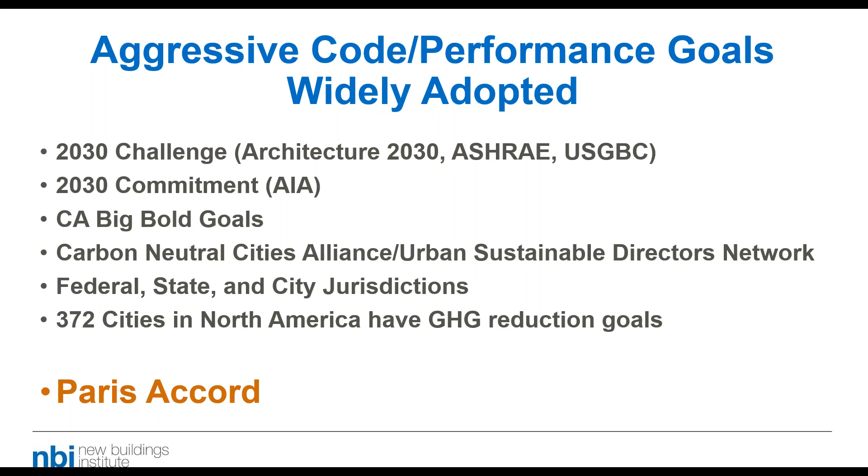Interestingly, since the Paris Accord, a whole bunch of cities and states have also signed on to meet the Paris Accord goals. Even though the US pulled out, the cities and states decided they were going to proceed with their commitment. Now 372 cities in North America have greenhouse gas reduction goals, so there's wide precedent and goals for improvements in building performance.

This is because it becomes more difficult to achieve that level of savings within the code process. It's not impossible, and we're working on it, but there are many aspects of building performance that are outside the scope of code and need to be addressed perhaps by design standards or other policy measures. For example, plug loads, unregulated loads, process loads, cooking loads are not really regulated by energy codes. To achieve the performance improvement we need in those areas, we might be talking about other mechanisms than code. But we're trying our best to get as much into code as we can.

Some terminology for background here. We talk about this as a series of measures for a stretch code. Other people call this a reach code or a step code. There are some places on the continent where these things mean different things, and places where the uses are interchangeable. For our discussion, we consider them all to be a similar process.

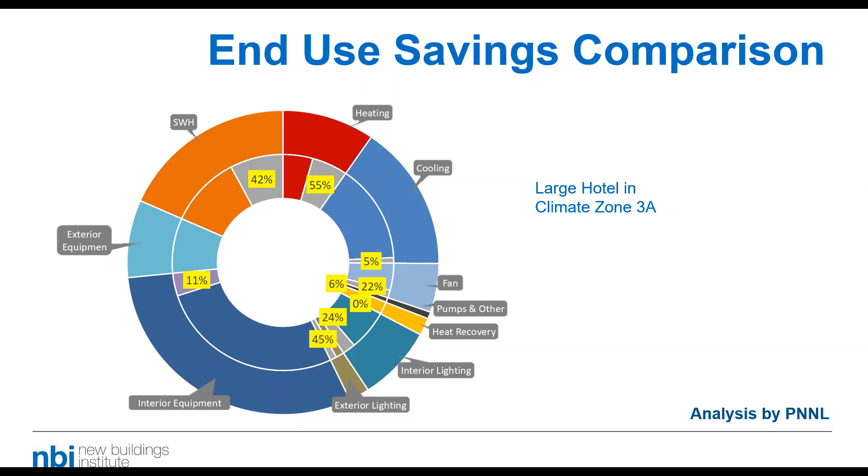The outer part of this graph shows the end use breakdown of a building that meets the ASHRAE 90.1 2013 standard, and the inner ring shows the end use breakdown of a building that meets the enhanced requirements after these stretch code strategies are adopted over that standard. So what you see is where the end use savings for this particular building type are from these measures. In the case of large hotel, we get a significant amount of savings in the service hot water area and another significant amount out of heating. That's a 55% reduction on heating from the heating energy, not a 55% reduction in building energy, of course. But you can see how the end use breakdown of savings came out in this analysis for large hotel.

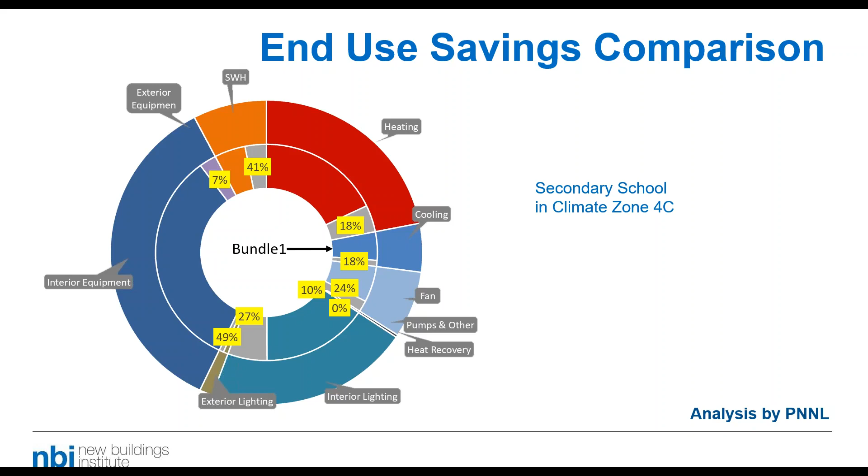And for comparison, here it is for a secondary school in climate zone 4C. Again, you can see the individual breakdown of savings. In this case, our largest category was in interior lighting, but we also got significant savings in heating and service hot water, which of course is a smaller percent of the load in this building type than in a residential building.

But as with all analysis of code performance, this gets weighted across climate zones by population and building type. And when we put that all together, the average savings across the entire building sector is just over 20% for this analysis.

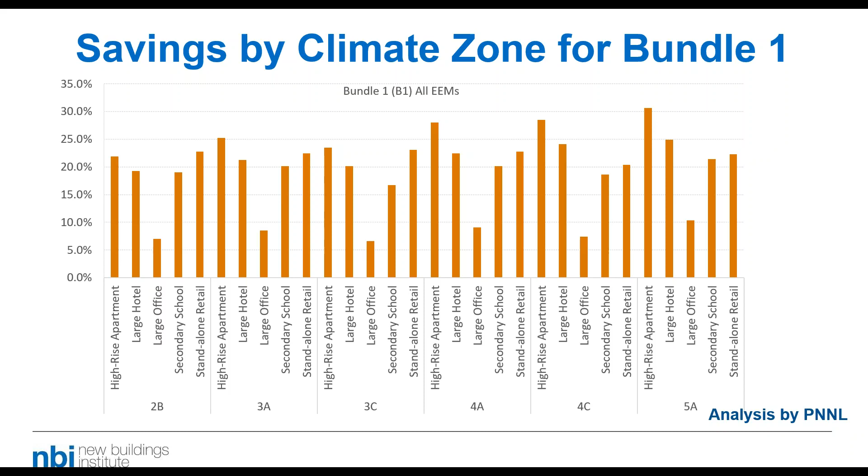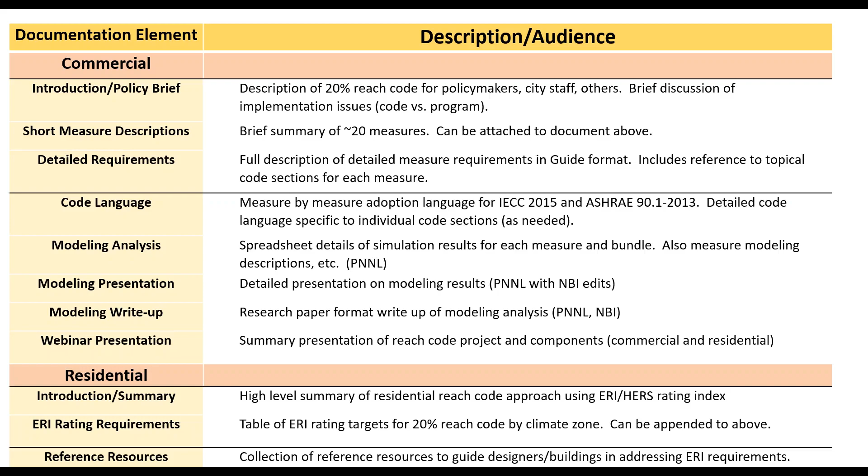So let me talk a little bit about what is in the documentation that we've put together. This is information that's available to you from our website. There's a whole bunch of supporting information, including this webinar will be available, but also the analysis from PNNL and a white paper about that analysis, etc. So on the left column of this slide, you can see all the different pieces of the 20% stretch code provisions that we've put together. There's an introduction policy brief document, a short document that you can use with policymakers. There's measure descriptions, detailed requirements, etc. down the list. I'm going to go through these real quickly just so you understand what they are in more detail.

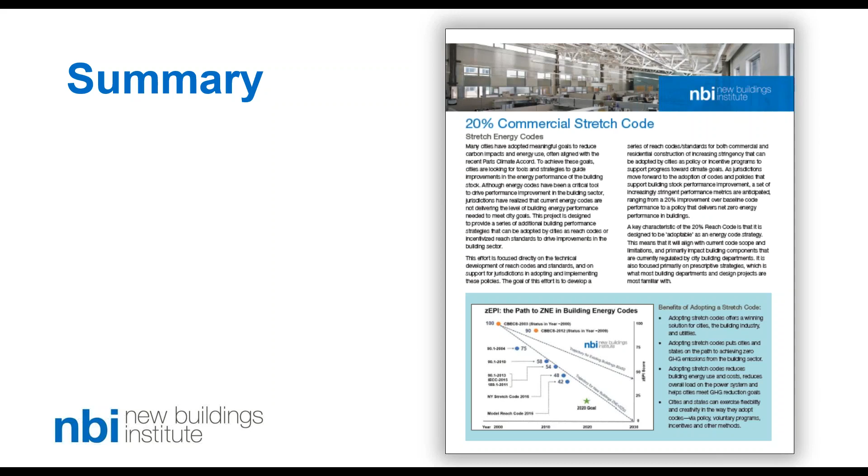So we have a standalone summary piece. This is meant to be an explanation of what stretch codes are and how they can be used. This is kind of a policymaker leave behind. If you're working with city policymakers or other political organizations that want to understand what we're working with here, this is a very short explanation of the stretch code, meant really just as a high-level summary. The main document looks like this, again available on our website.

And this is the whole package right here, all put together. It's also meant to be divided up if you want to target certain audiences with more or less technical information.

So this is the cover of our 20% stretch code provisions. We have an introduction that goes into detail about stretch codes, how they are used, what they're used for, why they're a good idea, etc. Again, just an introduction to the concept of stretch codes.

There are short descriptions. This is the short piece that goes through all of the measures that are in the stretch code. And I should point out that what I'm talking about now is the commercial side of this code. This goes through all the measures that we've defined to identify what strategies to use to add over your base code to achieve these savings.

It's a little hard to see in this, but the right-hand columns show the correlation with different sections of ASHRAE and IECC code to show you where this language would affect the existing base codes. So we did the analysis to ASHRAE 90.1 2013, but we also compared the code to IECC standards as well in terms of figuring out where it aligns and where it affects the code.

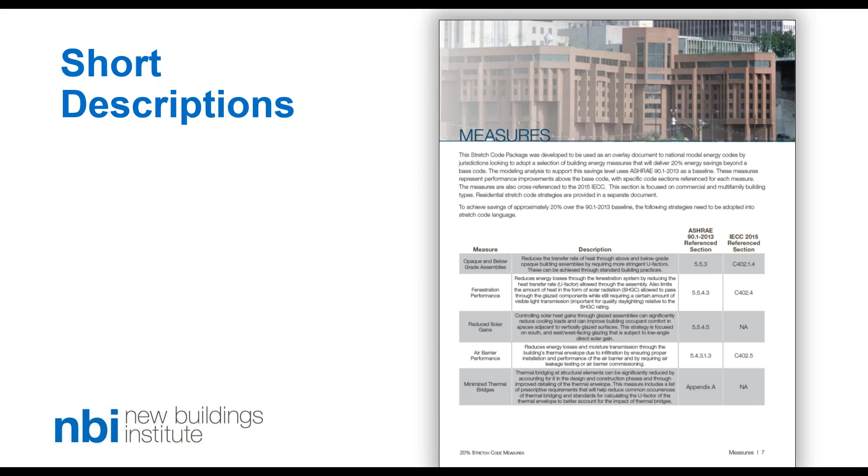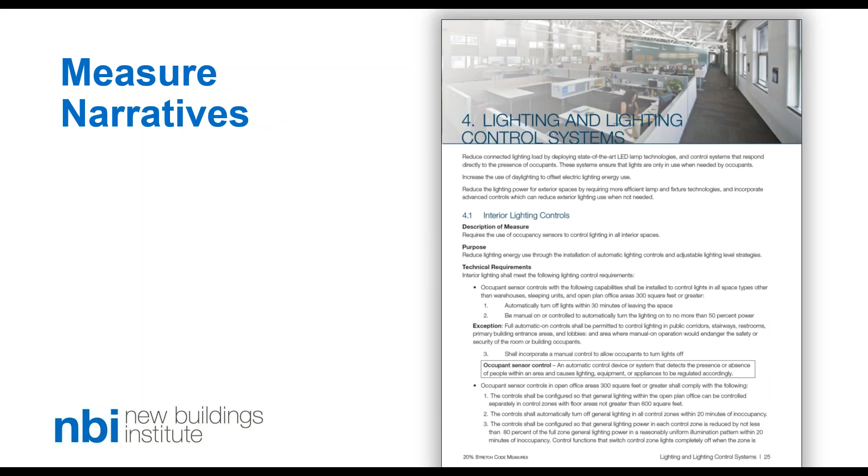There's a longer narrative about each individual measure through the course of the document. So this example here shows interior lighting controls requirements. You can see that we have a description, a purpose, and technical requirements for each measure going through the bundle of measures.

And then there's a bunch of case studies in here of jurisdictions that have adopted stretch codes, and those are pretty good examples to share with policymakers who are considering this. If you're trying to make the case that a stretch code should be adopted, you can get an understanding of what the implications are at the jurisdiction level.

Eventually, in order to adopt this as code language, you need to write the specific language that allows you to identify what is required in the code. This is highly variable depending on what your code baseline is, what your city policy is, and what your code cycle looks like. So in our document, we have identified the sections of code that would be affected by adopting these measures, and we've written the requirements, but we have not written it into specific code language.

We are happy to work with jurisdictions to adopt specific code language, but there are many different variants, and it would be a large effort for us to write it for every possible use. So instead, we are willing to work with you to help you identify exactly how to convert the language we've written into your local code.

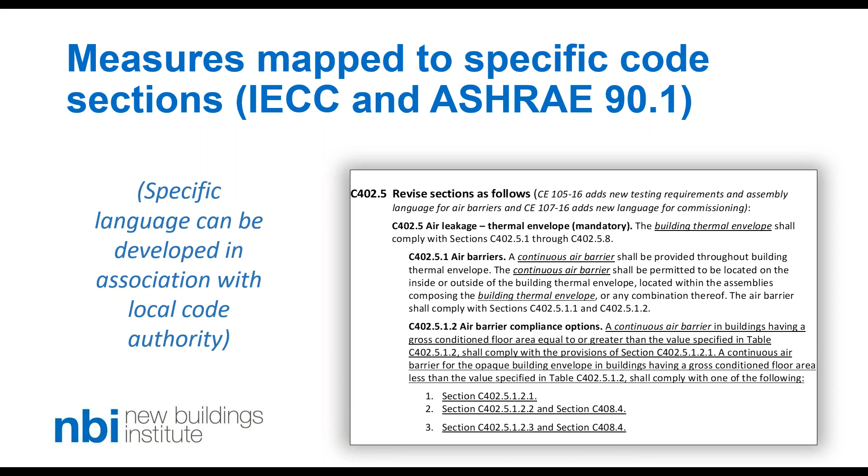So let's talk for a minute about some of the commercial measures. I'm going to hand this off to Mark Lyles to talk about some of our specific measures, and then we'll come back to some more general information. Mark? Great, thank you, Mark.

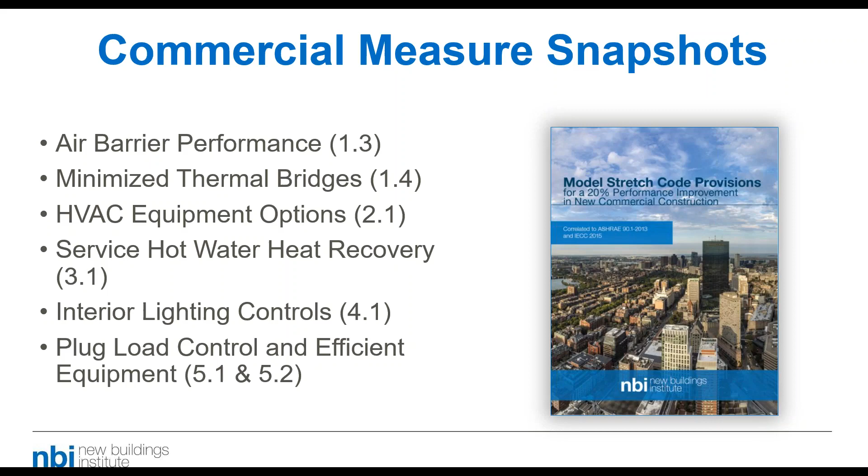I'm going to provide a quick overview or a snapshot of some of the commercial measures that you can find in the stretch code document. There are 22 measures in total, and I just plan to highlight a couple for you today. These are the ones that I'm going to provide a snapshot on. For each one, I will provide an overview of what the requirements are that are in the document, a breakdown of the energy savings that we saw from that measure through the analysis done by PNNL, and then what I'm calling an illustrative example of how we're seeing that measure being played out in the field, either from research that we've done or other information that we've found from people who are really leading designers and engineers in the field.

So the first one that I want to talk about is air barrier performance.

What we are proposing here in the stretch code is that for buildings under 50,000 square feet, they need to reduce air leakage through the thermal envelope by blower door testing their buildings. For buildings over 50,000 square feet, there are a couple different options that buildings can comply with. The first is to do either component testing, looking at a floor by floor basis, or they can participate in a continuous air barrier commissioning program conducted by a third party entity.

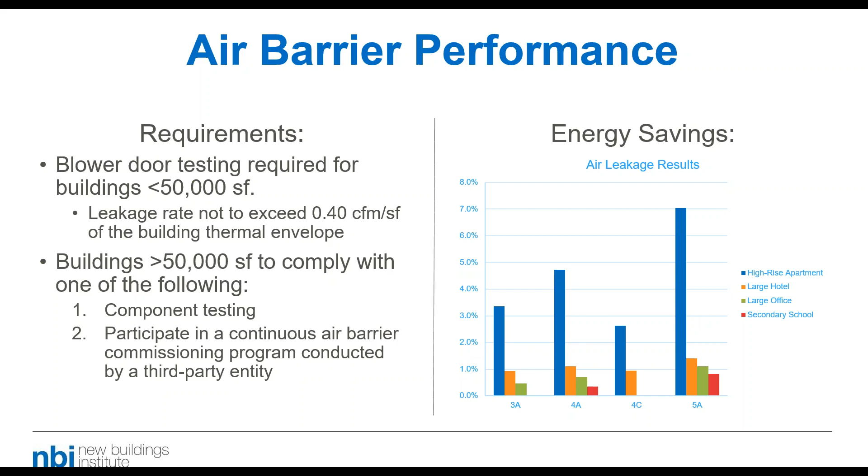As you can see from the analysis, the results are more significant in the cooler climates, which makes sense. And we're also seeing significant savings here from the multifamily prototype.

For the example here, I want to highlight an ASHRAE research paper that is looking at 31 different buildings in Washington State. Washington State and the city of Seattle have had this as a code requirement since 2009, so they have a good baseline of how this has impacted commercial buildings over a longer period of time.

What this paper looked at was five different air barrier types. You can see them there on the right: liquid applied, curtain wall, window wall, sealed sheathing, and sheet applied. It found that all but 4 buildings that they looked at met or exceeded the proposed air leakage targets. The paper concludes that a qualified design team should have no problem achieving the 0.4 CFM per square foot air leakage requirement that we are proposing in the stretch code.

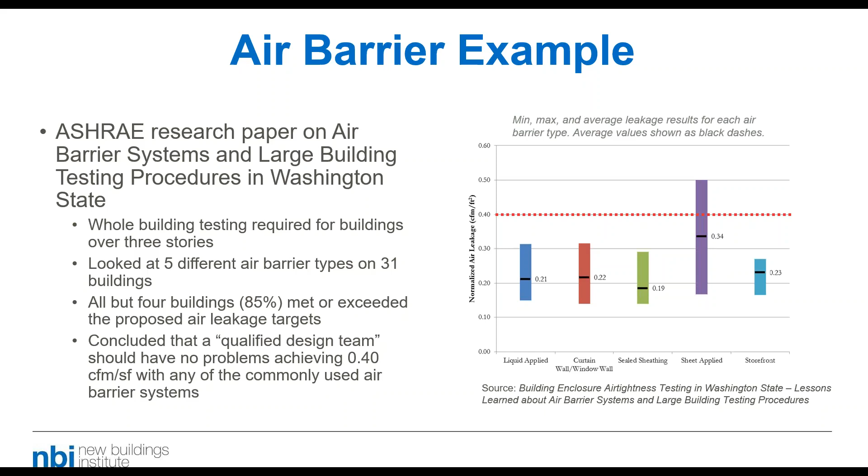The next one I want to highlight is thermal bridging. We're excited to introduce thermal bridging in the stretch code document because we know that under the current model codes, there's no good way for those codes to address thermal bridging through the thermal envelope.

What we're proposing here as a requirement is that design teams need to account for thermal bridging by using an area weighted average for each envelope component. So instead of looking at the entire assembly, we're asking design teams to look at the different components, in this case when they have a surface area that exceeds greater than 1% of the area of that portion of the envelope that they're accounting for — so for the roof, the wall, etc.

They don't need to do that if there's at least an R5 continuous insulation underneath it, which has been shown to reduce thermal bridging. But we're asking them to account for this for a majority of their common envelope interfaces.

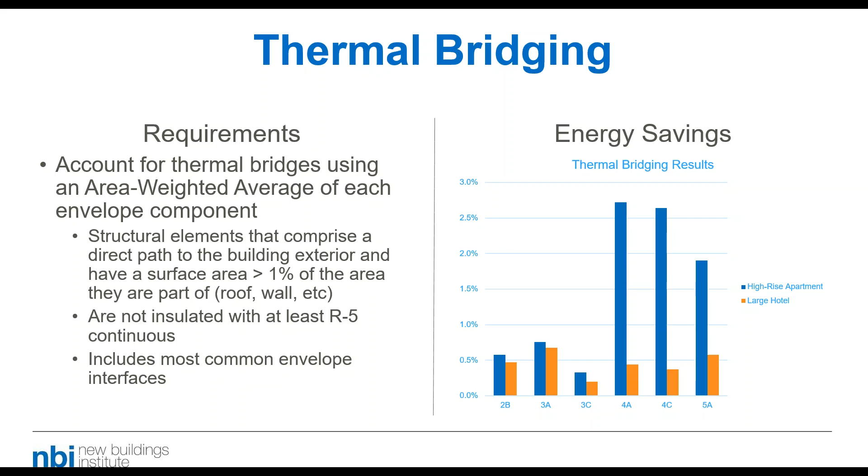Because the code does not really have a good way of addressing this, you can see that there are significant energy savings from this measure, especially in the cooler climates. We only looked at this for the high-rise apartment and large hotel building prototypes, but we hope to be able to analyze this for other building prototypes going forward.

Just a quick introduction of what thermal bridging is for people who may not be familiar with it. Thermal bridging is caused by highly conductive elements that penetrate the thermal insulation and/or misaligned planes of thermal insulation. They allow heat flow to bypass the insulation layer and serve to reduce the effectiveness of the insulation. In that picture below, you can see that the shelf angle supporting the brick bypasses the blue rigid insulation, basically compromising the value of that insulation, allowing heat to bypass it.

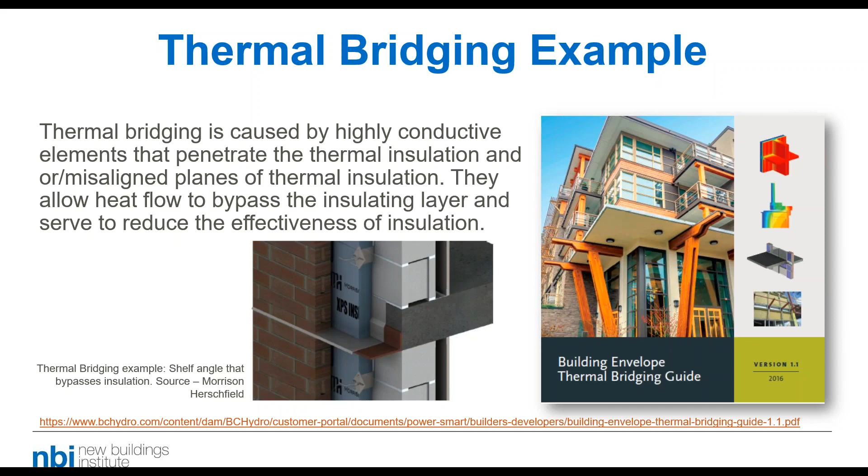A lot of this information I'm showing here is coming from a really great resource put together by Morrison Herschfield and available through BC Hydro, called the Building Envelope Thermal Bridging Guide. I've provided a link at the bottom of the screen for people who want to take a closer look at this document. I'm also going to quickly provide an example of how they're proposing to account for thermal bridging and some tools they make available to design teams.

In the example I'm showing here, they're looking at the U value for each construction type found in a typical high-rise residential building unit. You can see that they have called out the key components of that envelope for the concrete wall and then the window wall spandrel. They include in their document a catalog where they've modeled the energy flow, or heat flow, through each of those typical details within the thermal envelope.

I just wanted to highlight a couple things here. What I've circled in red shows the overall U value for the concrete wall and the overall U value for the window wall spandrel, which gets at what we're proposing through our area weighted analysis in the stretch code. I also want to highlight the balcony slab here, which even though it accounts for a smaller portion of the overall envelope, is responsible for the second highest amount of heat flow through the thermal envelope. So we know that non-thermally broken balconies are a major source of heat loss from buildings, and we just want to make sure design teams are accounting for it in their designs.

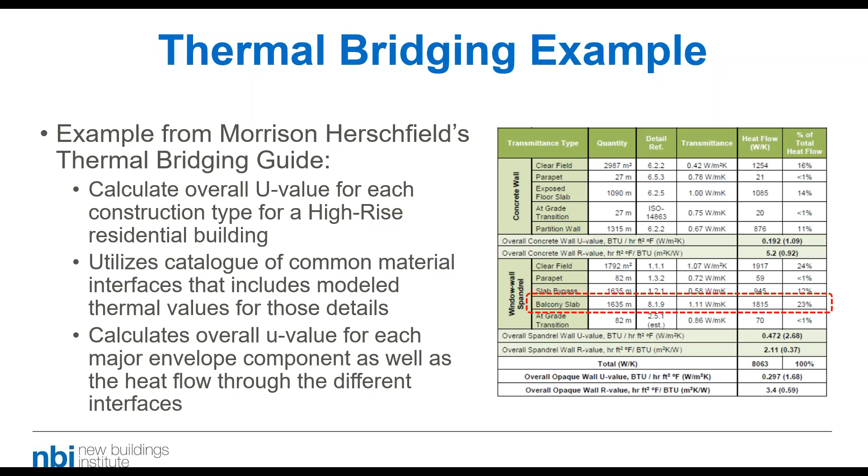The next one I want to talk about is our efficient HVAC or dedicated outdoor air system measure. This measure is focused on either selecting high efficiency HVAC equipment, and the values we're providing in the stretch code document exceed the federal preemption values. So we are proposing this as an option.

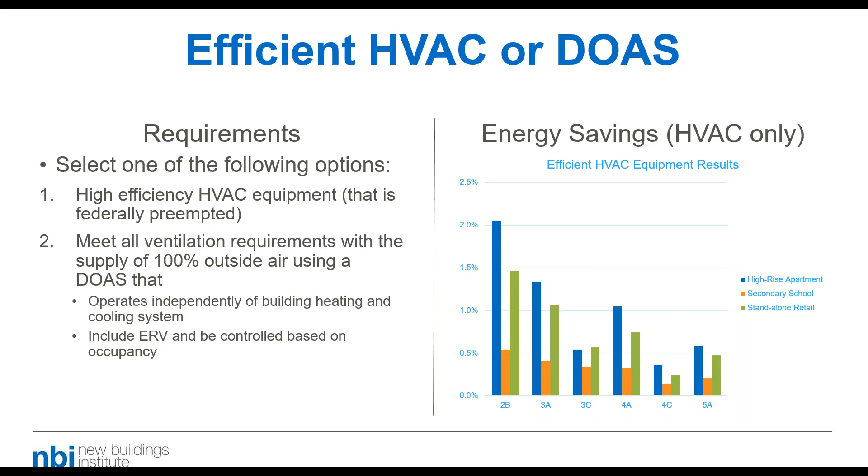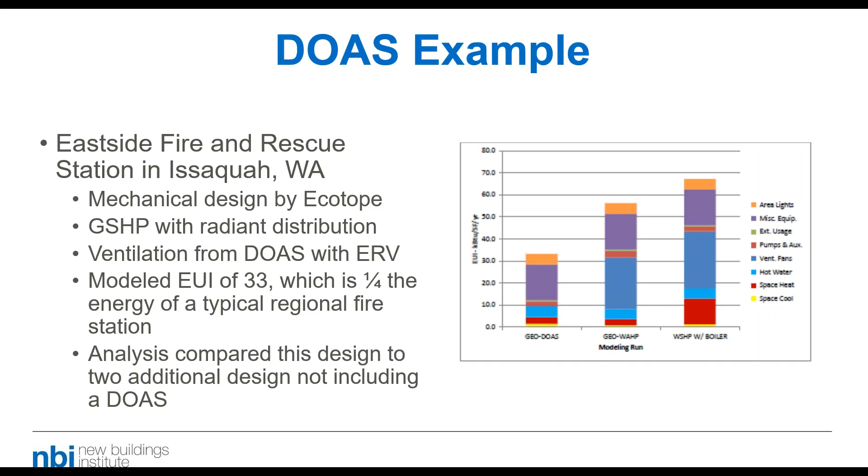Service hot water heat recovery is the next measure I want to talk about, where we are proposing that project teams utilize heat recovery and/or solar thermal water heating to meet at least 40% of the domestic hot water load. This has significant energy savings implications for high-rise or multifamily building types where you have a higher hot water heating load.

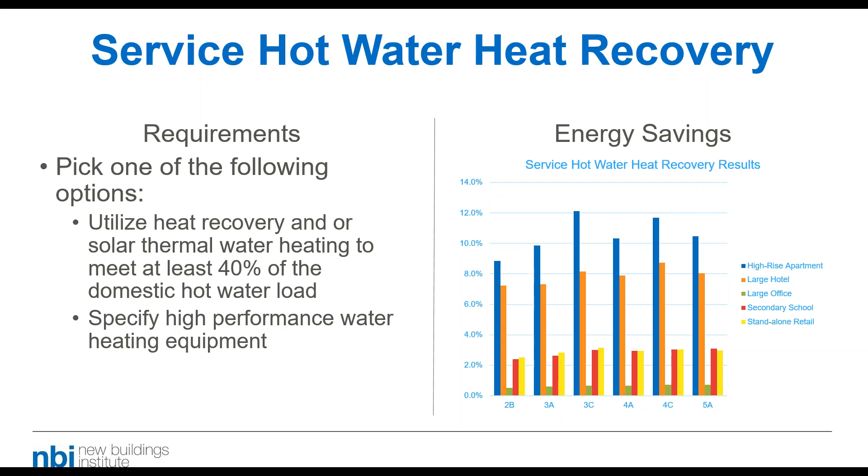This aligns with a lot of the analysis we've seen done for our multifamily initiative, also available through our website. The example I want to highlight here is a drain water heat recovery unit, which is one way to satisfy the requirements of this measure. What this does is recover all that hot water going down the drain of your shower, preheating that water before it goes into your hot water tank. We've seen this applied in many Canadian provinces, where it's even a prescriptive code requirement in Manitoba and Ontario, and a lot of manufacturers for this technology are up in Canada. It's also being proposed for Title 24, 2019 through the CASE initiative, so we'll be tracking that as well—lots of opportunity here for energy savings.

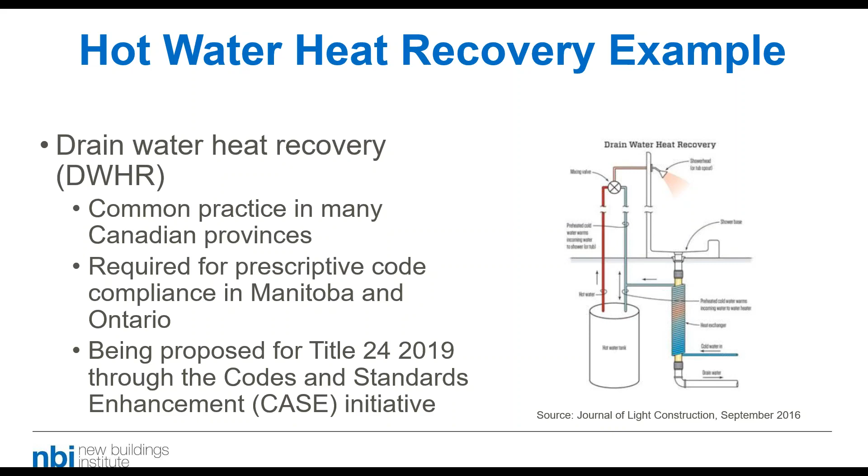Interior lighting control requirements are really structured around requiring additional occupant sensor control in most spaces. So we're expanding upon the base requirements found in 90.1 2013 for additional spaces that need to have occupant sensor controls.

The way we've structured it, there are specific requirements for open office areas greater than 300 square feet, and also for sleeping units, which need control devices that will automatically switch off all permanent luminaires and switched receptacles within 20 minutes of the space being vacated. So that applies mostly just to hotels.

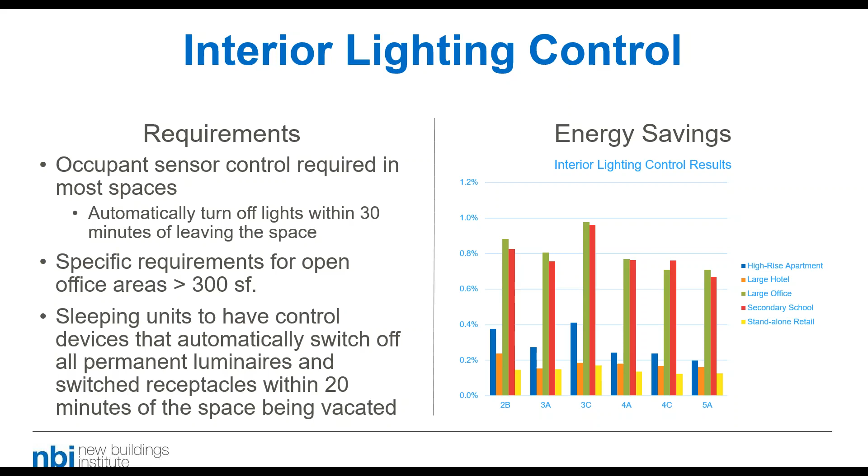The example here is from our 2015 study on zero net energy building controls. In this study, we looked at 23 building control systems in 23 ZNE buildings. When it came to the lighting systems in these buildings, we found that not only were they really efficient, they had LPDs that were 40 to 60% less than code.

Every one of these buildings was using photocells and occupancy sensors, and the lighting controls themselves were accounting for a significant portion of the whole building energy savings. In no cases was the energy savings less than 11%. So for these really high performing ZNE buildings we looked at, the design teams were counting on photo controls and occupancy sensors to deliver significant energy savings.

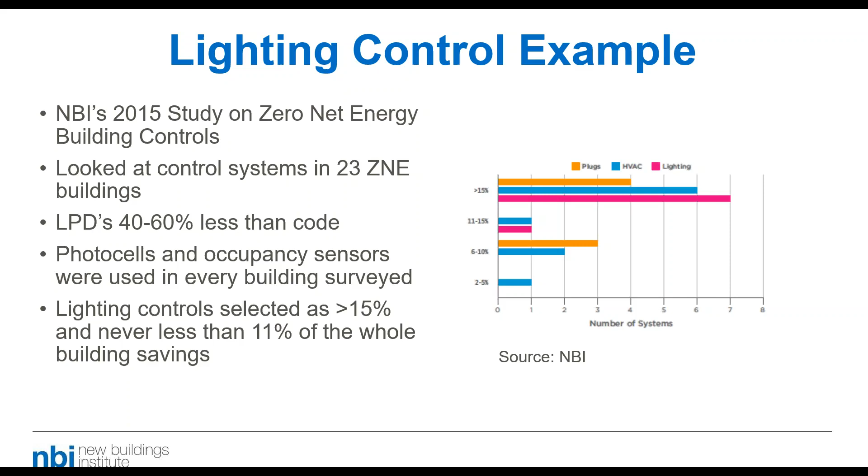The last one I want to talk about is plug load reduction. As Mark mentioned in his introduction, this is something that is a big bugaboo for us, just because a lot of the plug load equipment and loads are really outside of what you typically find in energy codes.

For the requirements, we are pulling in the requirements from ASHRAE 90.1 2013 about that 50% of all receptacles need to be controlled. Even though we couldn't claim any savings from that measure through the modeling analysis, we still wanted to make sure that that was in the code for any jurisdictions that might have the IECC as their base code.

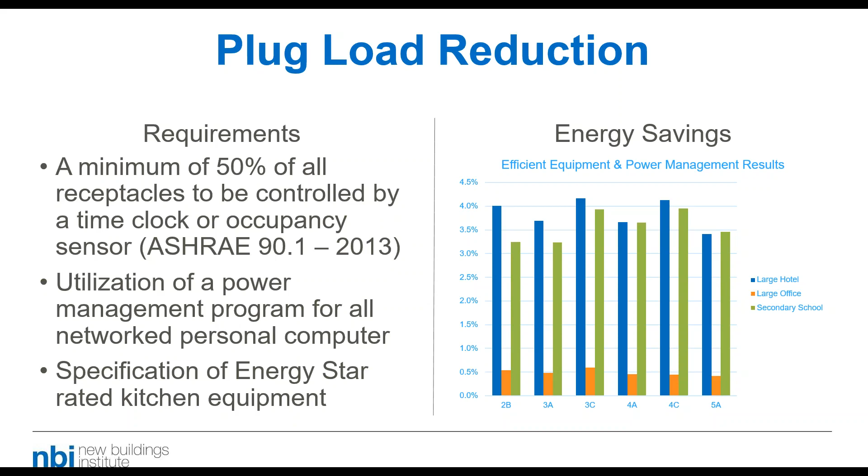So they have that as well, because the 50% controlled receptacles is not in the IECC model codes. We're also requiring the utilization of a power management program for all networked personal computers, as well as a specification of ENERGY STAR rated kitchen equipment. As you can see, the ENERGY STAR rated kitchen equipment is really driving a lot of the energy savings that I'm showing on the right-hand side of the screen.

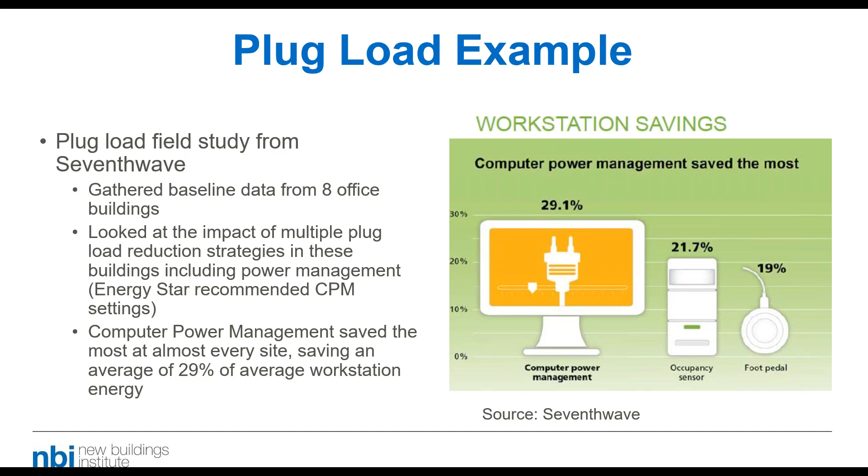The example I want to reference is coming to us from Seventhwave, who's done a lot of great field research on plug loads. In this case, they gathered baseline data from 8 office buildings in Minnesota, I believe, and looked at the impact of different plug load reduction strategies. They found that computer power management saved the most energy compared to the additional strategies they looked at. It was just over 29% per workstation, just by enabling the ENERGY STAR recommended computer power management settings.

So with that, I'm going to pass it back over to Mark. That is just a snapshot of the measures in the 20% guide, and Mark's going to take you through the residential requirements. Thanks very much, Mark. So what we've been talking about so far is the commercial code requirements that we've built into our stretch code provisions. Residential requirements we treated a little bit differently, so I'll go through some things about that.

The first thing we did is look at leading residential developers around the country in different climate zones to see what they were doing to achieve high performance in residential requirements. As many of you are aware, in residential there's a lot of use of the HERS rating system, the home energy rating system, and that has been adopted into IECC code as an ERI, an energy rating index for residential homes. That is the way we've keyed our REACH code approach.

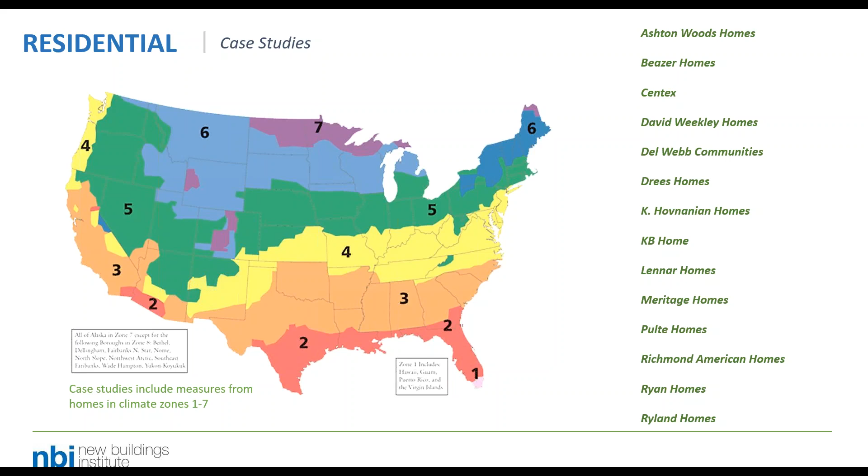Home automation systems play into this as a feature. Whether they are directly contributing to energy use or not, they provide the potential for better integration with energy systems. Ground source heat pump is a relatively common feature in high efficiency homes. Energy recovery ventilation and heat recovery ventilation we see very often, and some other features like gray water storage and recycling, which doesn't directly contribute to energy use per se, but is part of the package of these leading edge homes. Of course the windows are very good. We often see low E house wrap, very good airtight construction, and occasionally PV and battery storage.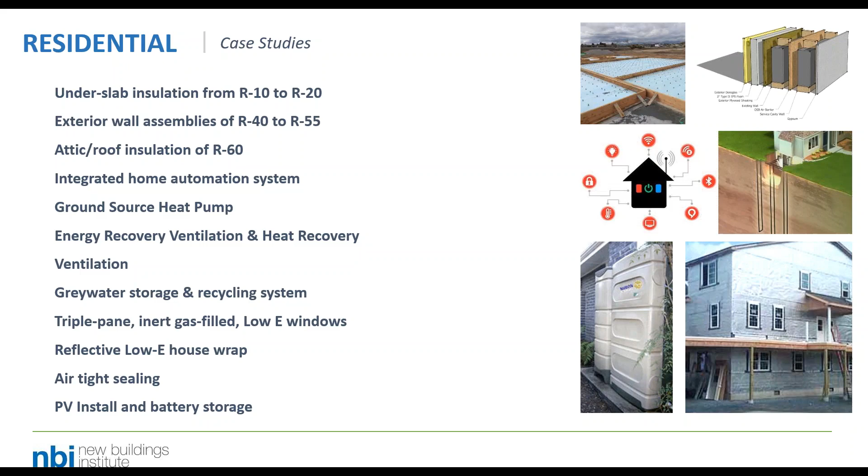So you can see that these are features - some of them energy features, and some related sustainability features, but they're fairly common in what's considered the best homes being built out there now. Based on this, we looked at HERS scores of different code prototypes, and that's what's shown on this chart. On the left, the code or program is identified. The approximate HERS ranking or ERI ranking is shown in the second column, some envelope requirements in the third column, and other features in the right column.

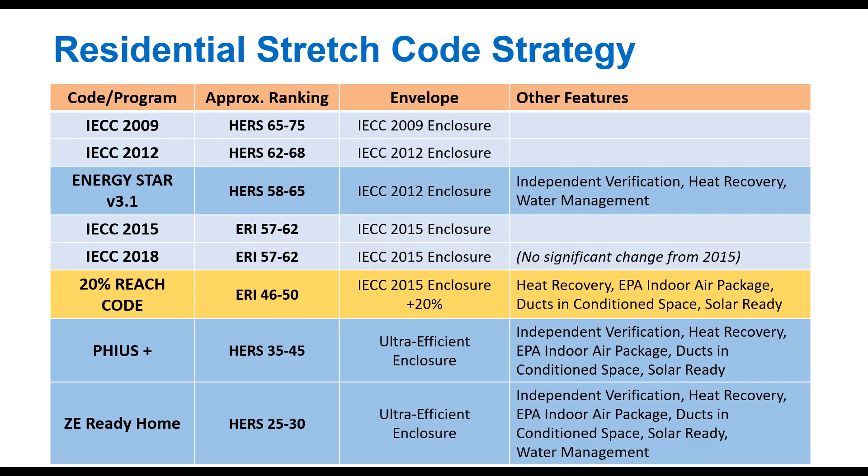Our 20% REACH code strategy is the yellow highlighted row. We're targeting an ERI of 46 to 50, which is better than current IECC requirements, not quite as good as the passive house standards or the ZE Ready home that's been released, but pretty close. We're following the IECC enclosure plus 20% for the requirements, and then adding heat recovery, the EPA indoor air package. Ducts are required to be in a conditioned space, and it needs to be at least solar ready. That gives you an idea of where our residential REACH code strategy falls in the larger environment of HERS ratings. You can also see the third row down is Energy Star 3.1, so we're targeting performance a little bit better than that, and IECC is also moving ahead of that now. Hopefully Energy Star will move up in that.

So that gives you an idea where we're at on our residential code targets, and that information will be on our website soon. It's not there yet. Right now we've released the commercial package, but we can give you the targets for HERS, which is a self-contained system, which is great. It's a great way to think about advanced performance in the residential sector.

So let's talk a little bit about where we want to go from here with our REACH code development. NBI is involved in developing code strategies and REACH code programs with different jurisdictions all around the country. Within the context of this model stretch code strategy, we're still planning to release a 40% strategy, a design standard. Much of it may be adoptable as code, but some of it probably requires other policy approaches. And we're working on ZNE code performance standards. All these things are happening simultaneously.

We're already working with jurisdictions that are targeting higher performance than 20% above 2013. We've also worked with a few jurisdictions that are piloting ZNE code approaches, thinking about how they're going to adopt those, or looking at outcome-based performance approaches. So there's a lot going on in the code world with different jurisdictions experimenting with different approaches to aggressive performance in the building sector.

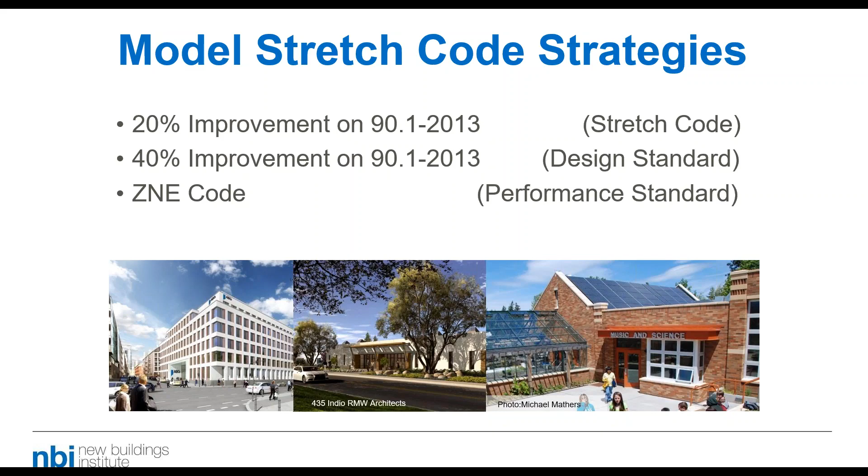Even though we design buildings to work perfectly, none of them actually do. So when you submit a code submittal for a building, you're assuming that everything's going to work the way it's supposed to, and that's what the code wants. But of course, we know that doesn't quite happen, so we try to account for some of that. And of course, that's an unregulated load because there's no way the code can address that directly.

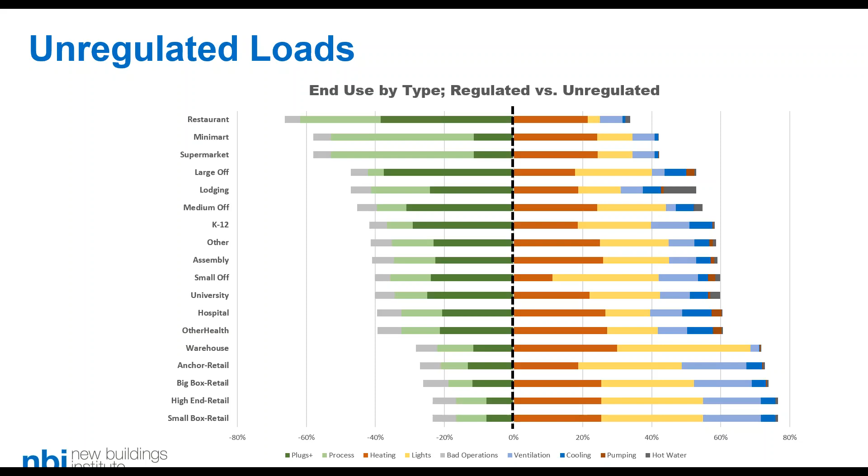And this is with a current code—this happens to be the Washington State Code from a few years ago, analyzed by Mike Kennedy. But what we see is that a large percentage of our loads are already outside the scope of code, so we have a difficult time regulating them. And that's going to become more and more the case. That's why I talk about needing to think about other policy approaches to unregulated loads to get to the kinds of net zero, 50% reduction, or 80% reduction targets that have been set around the country.

Heating is difficult to regulate because equipment efficiency is federally preempted. You can reduce heating energy use by improving the building envelope, but in general you can't directly tackle these through the code cycle the way codes are written now. So we need to think strategically to get to the kind of performance we're talking about, and strategically about mechanisms to start addressing these unregulated and difficult to regulate loads.

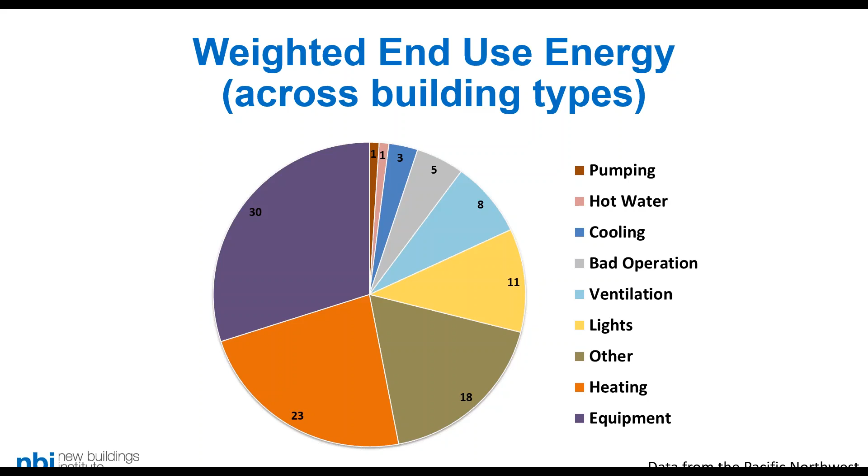And for unregulated loads, we have less ability to tackle those. So to get to net zero, we basically have to offset the energy used by the building with PV contribution. I think we're going to see more and more requirements in codes to offset energy use with renewables, whether that's on site or some other mechanism. But we're not talking about buildings not using energy, which is impossible. We're talking about using less and less energy so that we can offset it with renewables. So this is the way to think about code progression.

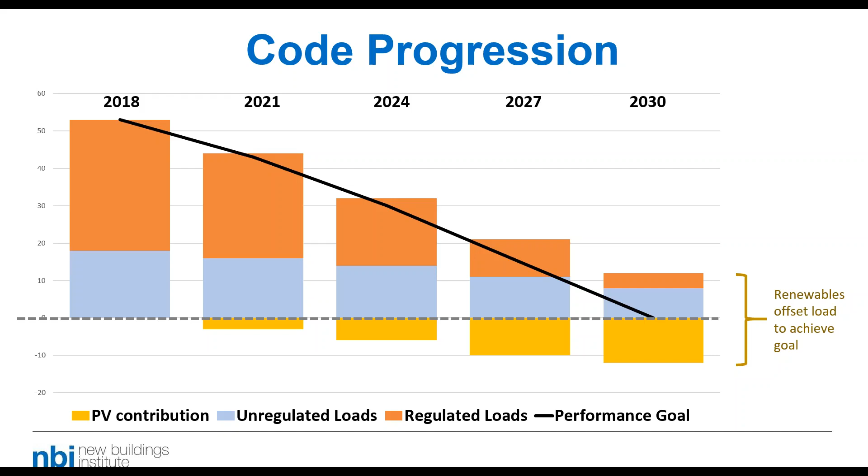So a few other resources I want to mention that we have for codes, and there's a lot more than this, but I want to highlight these. One is that we've recently published a paper — Mark Lyles, who's on this webinar, and Jim Edelson from NBI, our Director of Codes and Policy — published a paper on federal preemption.

It's a discussion of the role of federal preemption in code development. It's a great paper with a lot of interesting issues that talk about how difficult it is to regulate heating energy with federal preemption in place, and what we might try to do to work with that.

Another document we recently published, working with the National Institute of Building Sciences, is on implementation of an outcome-based compliance path in energy codes. This is guidance for cities who want to target an outcome-based performance path in energy codes — that is, regulating on actual energy use instead of on building physical characteristics. It's based on a pathway proposed and adopted by IGCC, by us and NIBS, a few years ago. It's evolved since then, and we've done a lot of work thinking about what the policy looks like at the city level. So this is also an interesting read if you're looking in that area.

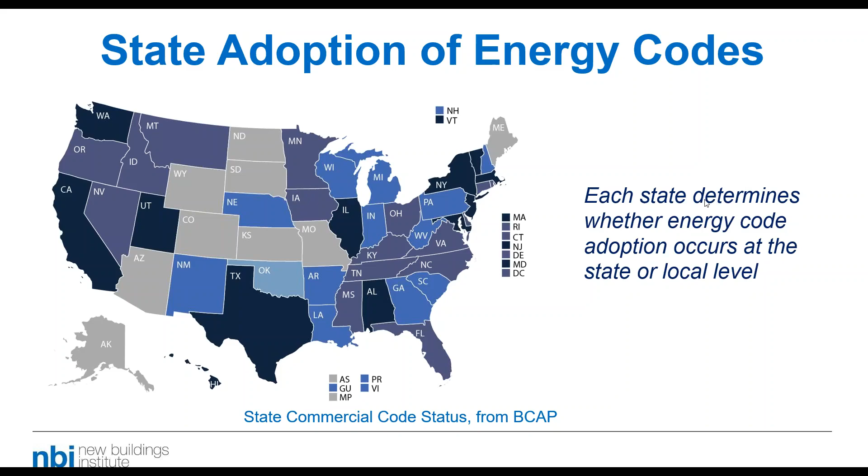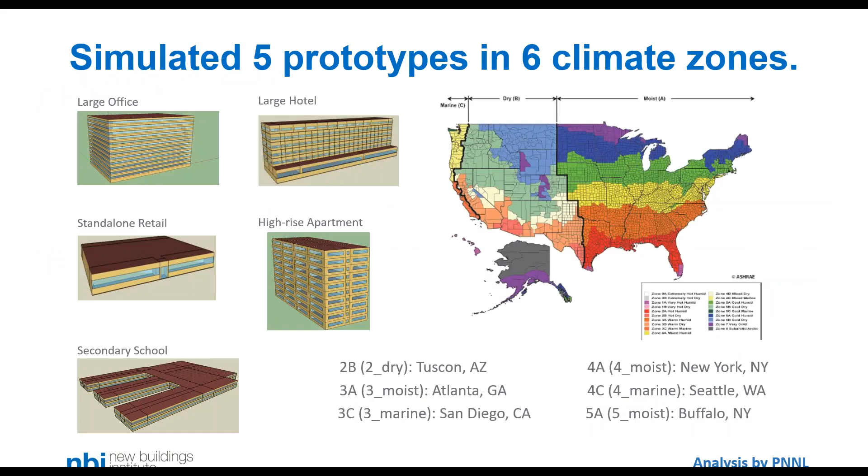Someone noted that the preliminary determination for 2016 IECC, or 90.1 2016, saved about 7% compared to 90.1 2013. That puts it right in the range I mentioned. The 2013 ZEPI score is about 54, so a 7% reduction from there is right around 50.

Someone wants to know when the residential 20% stretch code report will be available, and also whether ERI and HERS scores are interchangeable. HERS is a private system developed by, I believe, RESNET, implemented by third-party reviewers to score a home on the HERS scale. Because the IECC process is an ANSI process, it requires a consensus-based standard, so they can't use a privately implemented standard like HERS—they've adopted ERI instead. There might be some very subtle differences, but essentially it's the same approach. As for the 20% stretch package, information about the prototypes and strategies, other than the targets, should be available in about a month, maybe sooner.